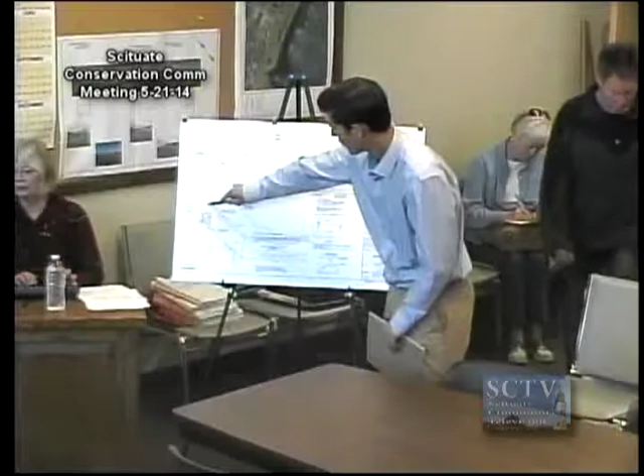For the record, my name is Jeff Bassett with Morse Engineering. This is an RDA for a septic repair at 111 Summer Street. This property is about an acre in size. We have the wetlands delineated by Brad Holmes, shown in blue here, with a 50-foot buffer in red and a 100-foot buffer in green. The property is developed with a bituminous concrete driveway, a single-family dwelling, and a barn. Currently the cesspool is in the backyard. It failed the Title V inspection, so we're looking to put in a new system. I believe the owners are looking to sell the property, so that's what triggered this process.

We did test pits back here and found good loamy sand down about 4 to 4.5 feet. The grade comes up right here, which is why we chose this area. The elevation is about 111 over the deck or patio in the back, and it drops off fairly quickly to 108. So we're able to extend that grade out a little bit and work in a leaching field where it won't look like a mound, since we found good material.

Due to the extent of the wetlands, there's a limited area. This area is also very low lying — it's pretty wet when you walk around there after a storm. The grade's a little higher out front, but after you put a 10-foot setback to the property line, and there's a large tree, a driveway, walkway, and retaining wall, there really isn't any room. So we feel this is the best location for the septic.

There are 2 test pits. It runs by gravity to a septic tank, and then a pump chamber will pump it up to the field. We do have an erosion control barrier at the limit of work.

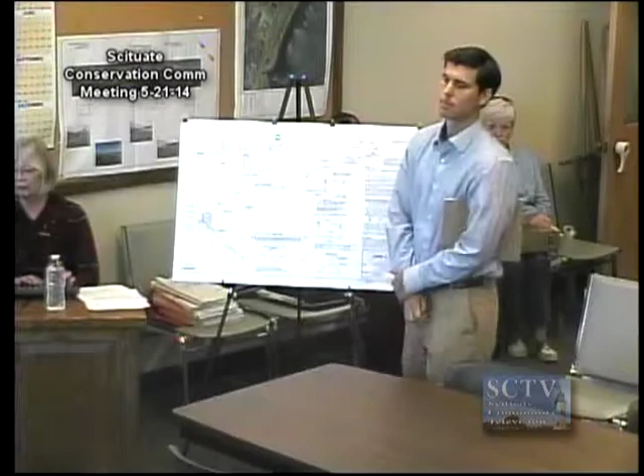So the tank you're putting in now, how far is that from the wetlands delineation? The tanks are 100 feet. The leaching field, the plastic chambers, about a foot deep, 2.5 feet wide by 5 feet long, are 81 feet from the wetland. And that's as far up as you can get it, really, with the soil testing and so on. And it's the same size tank you're replacing it with as the one you're removing?

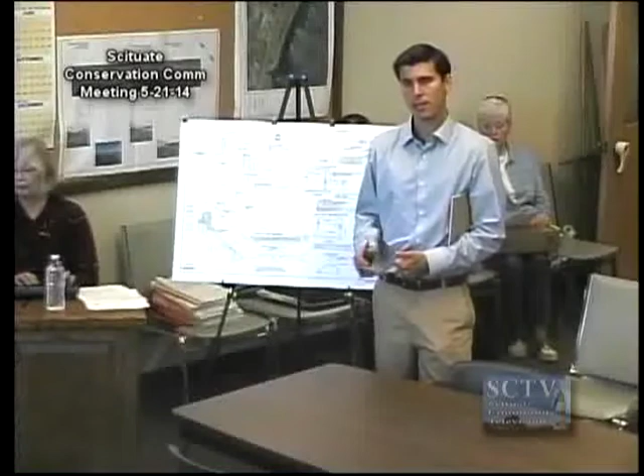No, the regulations were different when this was installed. It's basically just some type of cesspool on the ground. By today's Title V standards, you have to have a 1,500-gallon septic tank. And in this case, it has to be pumped in elevation to get adequate groundwater separation.

So we need a pump chamber as well, and then a leaching field. In the past, they would just do a pit that was deep, and that didn't protect the environment because the bottom of it went into the groundwater table, and you get bacteria breakdown as it infiltrates through the soil. So now what they do is a horizontally larger system, only about a foot deep, so it spreads the leaching out more, instead of just a small pit. We're replacing that with a larger system because that's the new standard.

The former owner of this house did a lot of site work and stuff himself, so there could be almost anything in the backyard. From years and years ago, not recently. You know, if you walk out there, there's stuff from years and years ago.

Penny, did you ask about some material that's sort of in the wetlands? Yeah, there was some clearing stuff in the buffer, and there's debris in the wetlands. There may even be concrete and brick stuff, but there's a lot of old Christmas trees and stuff like that that's dumped into the wetland and the buffer, so we could probably get some of that cleaned up as part of this project. I think that'd be a good idea.

We could condition it, even though it's an RDA. It might not be a bad idea to have some sort of markers too on this one, so that people know where the wetlands are. But, yeah, okay.

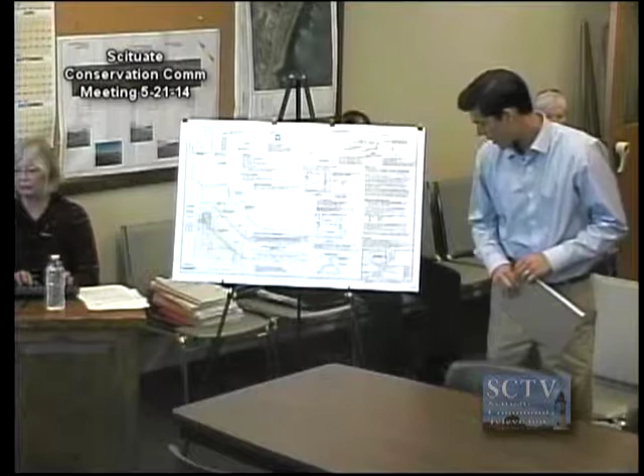4x4s with markers. Did this one go through DEP, Board of Health already? Yes, it has. We submitted it about a month ago. We got a couple comments, just adding a note, a couple notes which didn't change the design. We submitted that back on May 12th. I called a couple times, left a voicemail today just trying to verify if it had actually been signed off on. I believe it has, but I can't confirm that.

So pending the sign off, we could still find it a negative pending the finding, with a couple of conditions on there. Okay, anybody in the audience for this?

Okay, a motion? I make a motion for a negative 3. Great, second, with the aforementioned conditions. All in favor? Aye. Thank you, sir. All right, thank you.

Geary, 0 and 23 Parker Ave, amended stormwater.

I love this guy. Holy moly.

On May 21st, 2014, at 6:45 PM, Town Hall, the Scituate Conservation Commission will hold a wetlands hearing under the Town of Scituate Code of Bylaws to amend the orders of condition issued under DEP file number 68-2457, regarding the application of Michael Geary to replace a retaining wall with a stone wall, revise the stormwater system, regrade, and install plantings on property located at 0 and 23 Parker Ave, Scituate. Abutters and other interested parties are invited to attend.

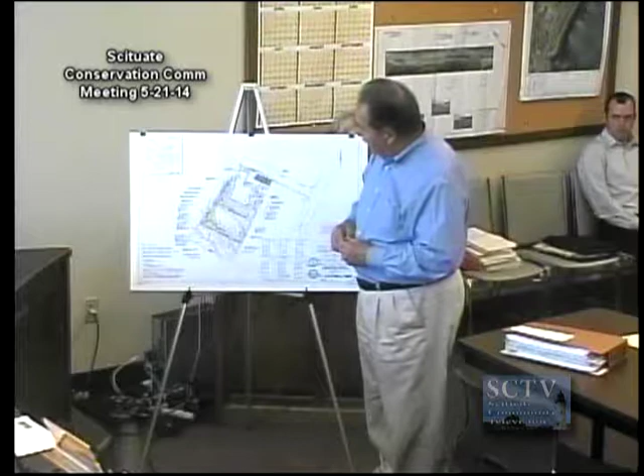What we are doing as far as stormwater is these yellow circles represent subsurface leaching pits. Outside the buffer zone, we'll take the runoff from this portion of the house and the driveway and recharge it back into these two pits. Down in the lower part, there are three additional pits that will pick up the water coming from this area toward the lower portion of the property.

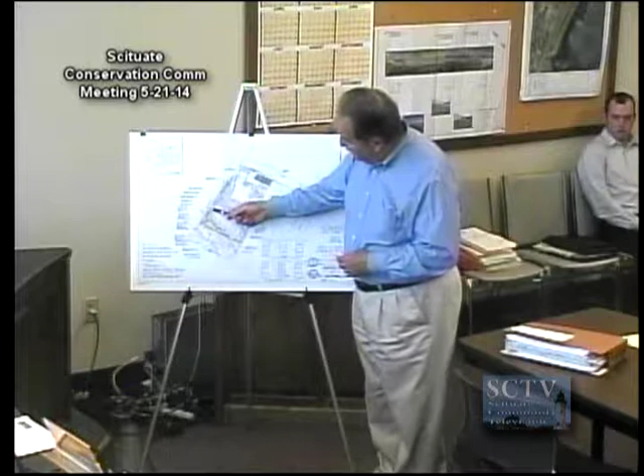This is the architect's plan as well. We've got a series of plantings along the perimeter of the area, as well as quite a bit of landscaping outside the buffer in this area here. So that's the extent of the changes.

What we've done is pull way back on the amount of fill we brought in on the site and the amount of wall, and we've done the stormwater calculations, which are being reviewed right now. So with that, I'll end my presentation and answer any questions you may have.

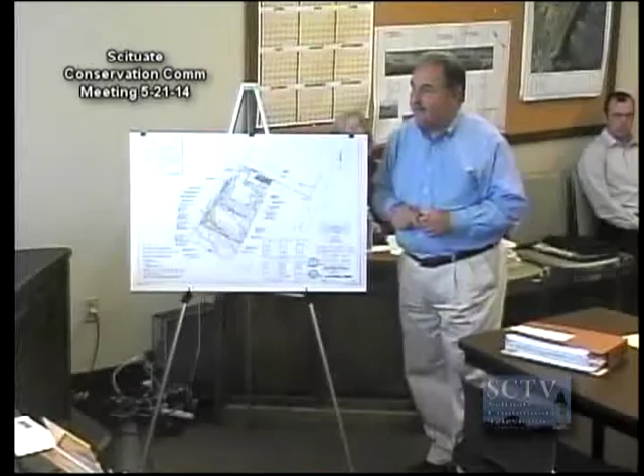Penny? I got this today, so I don't know if you already saw this on the additional comments, that we understand...

We review the project as it pertains to stormwater regulations in Scituate, and our initial review resulted in a number of relatively minor comments, some regarding the calculations, the nuts and bolts of the calculations. We had suggested test pits beneath some of the drainage structures, and there were some details on the plan we requested to be clarified so that it would be built correctly.

That resulted in a revised plan and submittal from Ross Engineering, which I subsequently reviewed. There was one outstanding comment, which is the comment you just read, Penny, regarding a detail. I submitted the letter to Pat yesterday because I wanted to get it to him as soon as possible. After the letter was submitted, Greg Tansey from Ross clarified that and showed me where that information was in the detail. So I followed up with a second letter to the commission, with no comment.

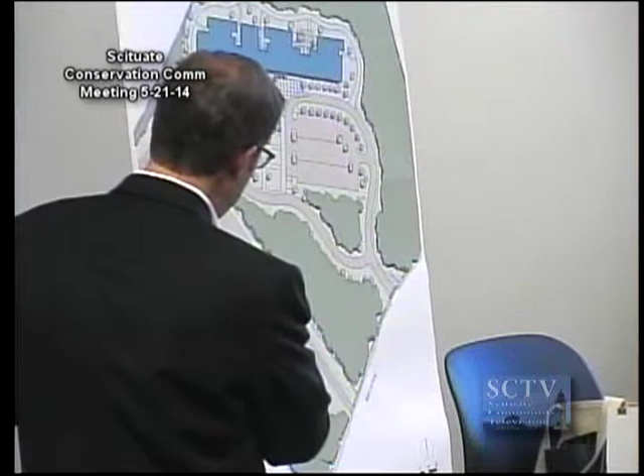The three sites are the existing Gates school site, the high school site, and the Ellis site. There's no wetlands at the Gates site. Okay, so at 3A and Mann Lot, the school controls about 22 acres of that property. For context, this is where public safety is currently being shown. The larger wetland, again both created by drainage, is in this corner here. We originally had the building pushed closer to the intersection, but we pulled it away to get out of that wetland buffer. The second wetland is here, which is much smaller, and certainly would be some jurisdictional concerns there. So those are the wetlands on this site, except for what we discovered that runs off the back of the school property down the far end of Mann Lot.

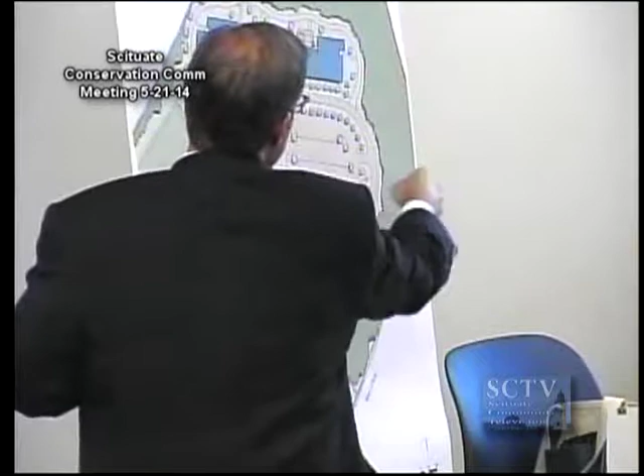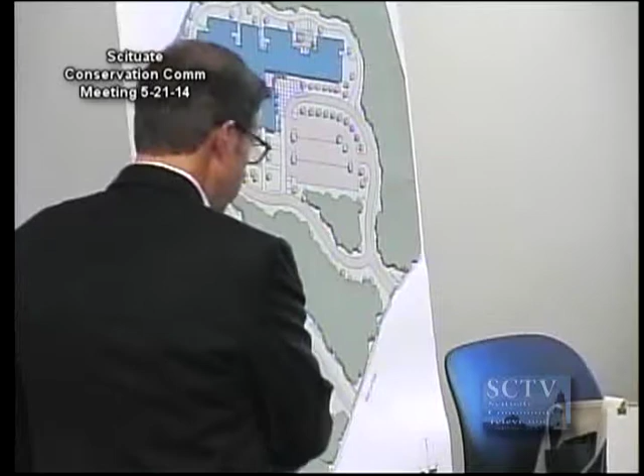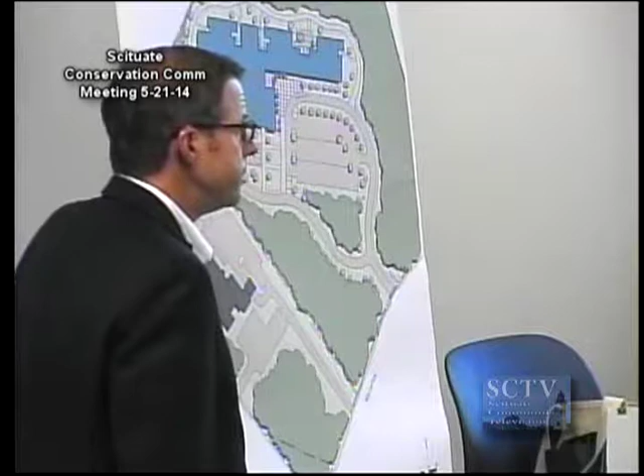So the school and all the development is, we suspect, outside even the buffer in that case. The two front ones are really small, isolated wetlands. They're pretty small, this one's very small. This one's a little bit bigger in the corner. But the back piece, Pat, is it BVW? I haven't been out there. Okay, so you can see it from Mann Lot Road.

So that's just a quick look at the Ellis site. At the high school site, what we're proposing is what's called a co-located middle high school, in that they'll be joined. Programs will still be separate, but it'll be a new middle school attached to the existing high school. Because there's some additional space in the high school, we'd actually utilize some of that high school space for the middle school, making the overall building more efficient in terms of its programmatic use. So just from a site planning perspective and where the building's going: Town Hall, Police, and Fire, 3A and First Parish Road.

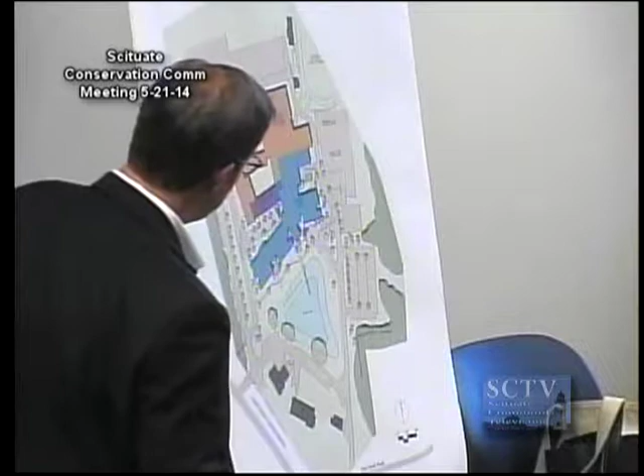Access into the high school is currently right here, with secondary access off of First Parish Road. All the buses run along down the right-hand side. So this blue would be the new 6th through 8th middle school. The thought is to bring the 6th grade up out of the elementary schools, include them in a middle school which is more traditional in nature, having the 3 grades. They're set up in teams or houses, so you have a 6th grade team, 7th grade team, 8th grade team, and this is all 2 stories.

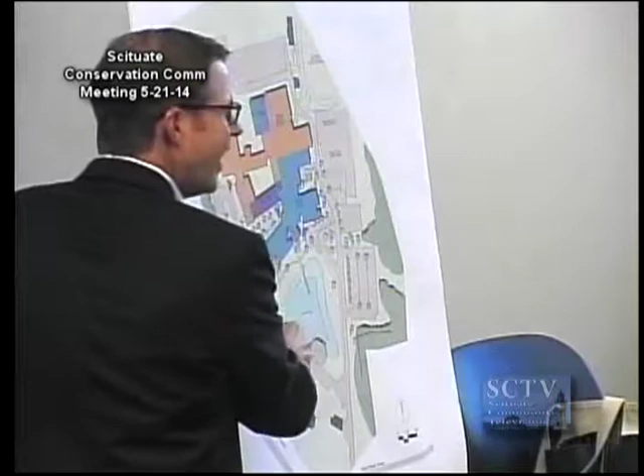You know what, we could probably just stick to how it pertains to the wetlands. Yeah, just giving you a sense of what's there. You'll have plenty of time to run this spiel, but I'm just trying to give you some context.

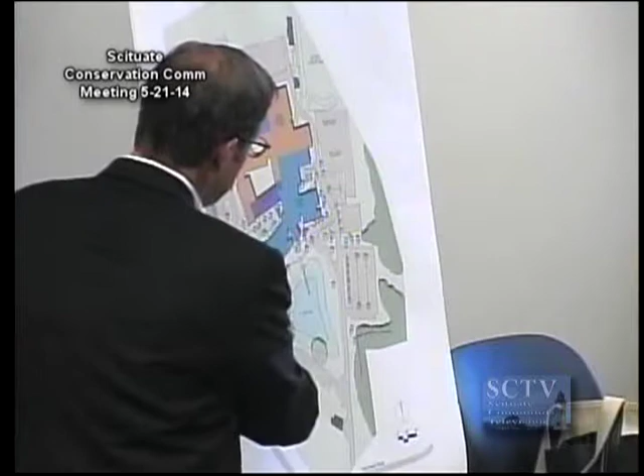So the vernal pool, this is the estimated edge of the vernal pool. We do have a survey that's done, and this is pretty darn close to that. As you know, as the vernal pool exists, it's developed right up to the edge of the water when the water's there. In fact, it's mowed into the vernal pool when it's dry. So what we're proposing to do is locate the building about 125 feet from the edge of the vernal pool.

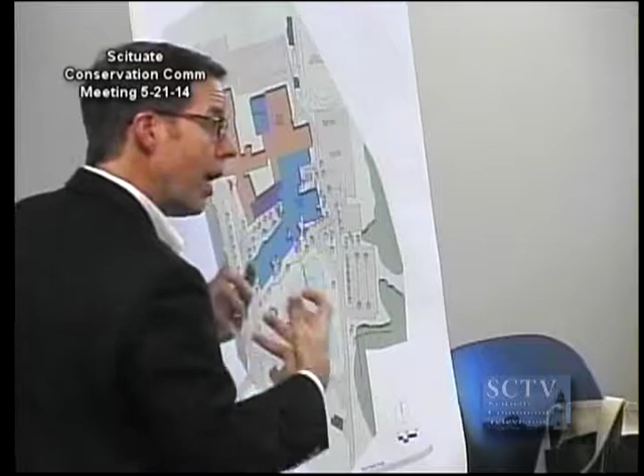We want to naturalize around the pool, and right now we're showing about a 50-foot buffer that would be completely naturalized. The thought is that the other grass around there would be secondary, perhaps mowed, perhaps not, but would not be developed, certainly would not be used for playfield as it's done now. One of the driving forces for the school from a programmatic perspective is to try to get more outdoor education, so we've created places to allow students to get outdoors, and we're hoping that we might be able to create some sort of a dock that would bring students down to the water's edge to observe, take water samples, things of that nature.

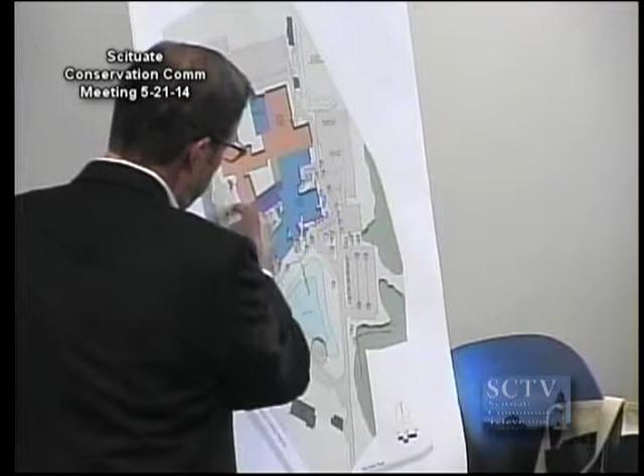That's what's being shown here as a possibility, and then perhaps a small walking path that connects the main entrance of the school back over to a sidewalk here, which leads to the high school. So that's the quick hit on what we're trying to do and how we're actually trying to enhance what's there now, as opposed to keeping its current situation and degrading it further. Really, kind of use it as a nature's classroom. It's a resource that currently right now is not used. It provides an opportunity for a sort of a nature's classroom, if we can find a way to enhance that as part of an educational program.

Pat, can I ask to be excused for a second?

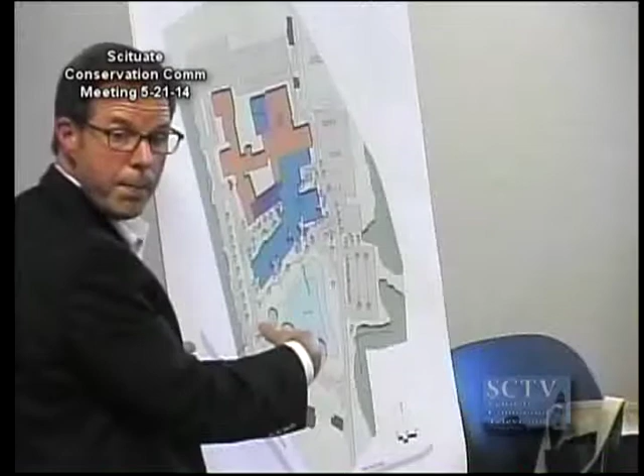Pat, can you see anything negative in this plan? I was just wondering if there's an area of trees in the back, are they to remain in this back corner, the wooded area by the playground, close to the edge of the pool there? Yes. On the other side, I don't think we've shown all the trees that are currently around the vernal pool, where that buffer, the light blue is. Yes, they'd still be there. So is the answer that you don't see any issue there?

I mean, I think there's probably going to be some questions because this has gone through the permitting process in the past, this area, so there'll be some old files that we will have to check.

As far as the outdoor classroom, it's done in other towns—boardwalks and things like that. You have to look at what's already disturbed around here; it's not pristine all around the area. There may be some flexibility, but it's going to involve other departments in addition to us. But I think we're at the point where we're interested in hearing about it.

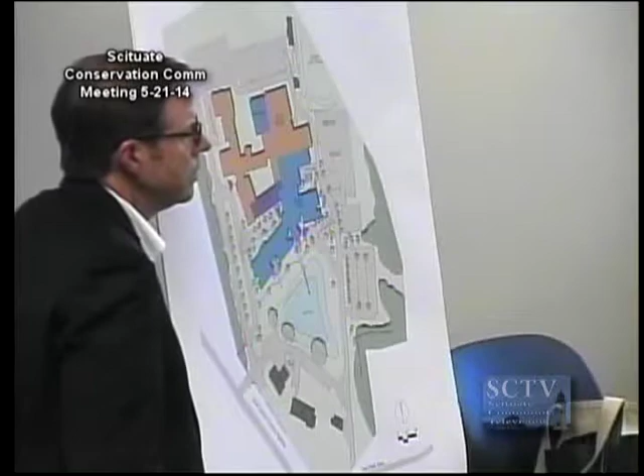Just a little bit of history. Obviously this was created for drainage for the high school, but Pat enlightened me that detention areas built long ago can become a vernal pool, wetland, whatever they evolve to. Today, if that were developed as a detention area, it wouldn't be—there'd be a stipulation that it would not become that, so it could be maintained. So it's kind of tricky in that we can't really maintain these things that were originally created as a drainage area. As was pointed out, right now the DPW has been mowing to its edge. Until a few years ago, it really wasn't recognized as a vernal pool.

A question came up when we were trying to look at doing the ball fields as to whether it was, and John Richardson, who's passed away, was an environmental consultant who came out and did a report for the commission and recognized it. Subsequently Pat's looked at it, and there's not much question that it's a vernal pool. But as you can see, it really hasn't been treated or protected very much.

So the consideration would be, when we discussed out there at the site, if a nice buffer could be constructed around it and protected, and then a grass area around that—it's by far better than how it's being dealt with now. So we're not endorsing the whole project one way or the other.

My kids are all long gone from this, but just in terms of protecting this as a resource, that seems like a reasonable approach. I did ask the question, though, and I don't think anybody really knows whether this is fed by any under drains, whether there's anything coming off the roof. Do we know whether this gets fed from, like, parking drainage?

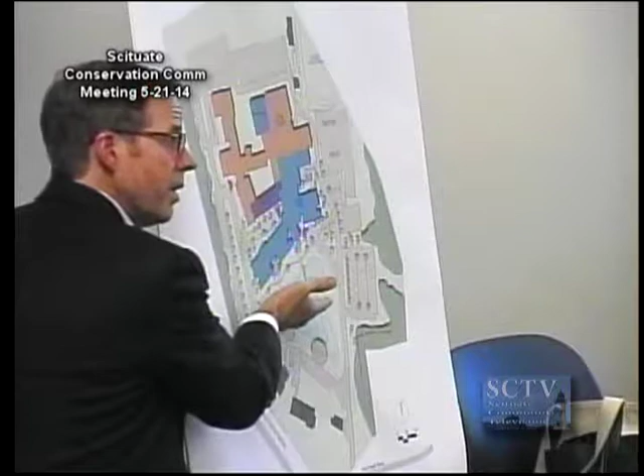Right, and that's what we're trying to maintain, because we understand there's a precedent the board has set previously. It's important to note that right now it's just about the edge of building that's 125, so there would be some disturbance during construction. And I believe you have jurisdiction within 250 feet of the vernal pool, so we'll be very careful with the protection of the pool during construction, pre-construction, post-construction, and so forth.

I think I can speak for this commission—I think we're a fairly realistic board, and when you have a piece that already has much more disturbance around it, and you're looking to make it better in the process. Yeah, I agree, totally. If that helps.

Before, when they tried to use it as ball fields, there was only going to be like a 40-foot buffer, and they wanted to fill—that's where the problem came in with them. So we really have to try and keep the 125 as close as possible, which is not just us, it's the state.

And the only other thing I do just want to point out is that the walkway, I think, is a great idea, but it could not be a paved walkway. Right, it would have to be more like a boardwalk. Yeah, something like that—that's the only thing I want you to make sure you're aware of from the get-go, that we're not going to let you put...

Couldn't Natural Heritage recommend some materials? Ms. Divas just got a whole bunch of recommendations on walkway guidelines, for your information. Yeah, for this trail. We want the walkway to be accessible, but also needs to be handicap accessible.

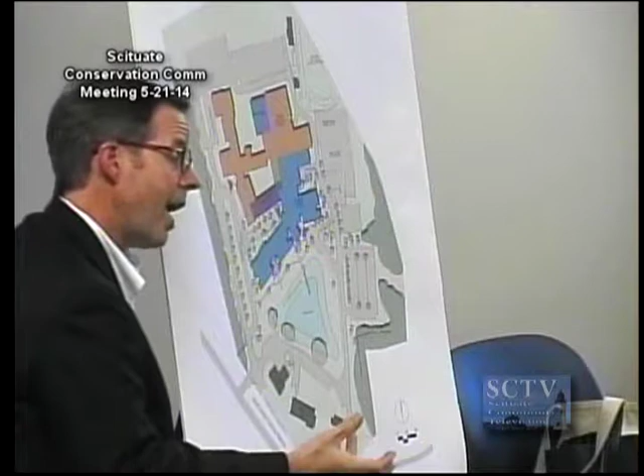As with access to the water's edge, they could suggest some material. But I think your key here is to try to keep that 125 foot buffer, because we were very strict on that when the rec department wanted to put a field in. It wasn't going to work because there was no way they would stay out of our buffer.

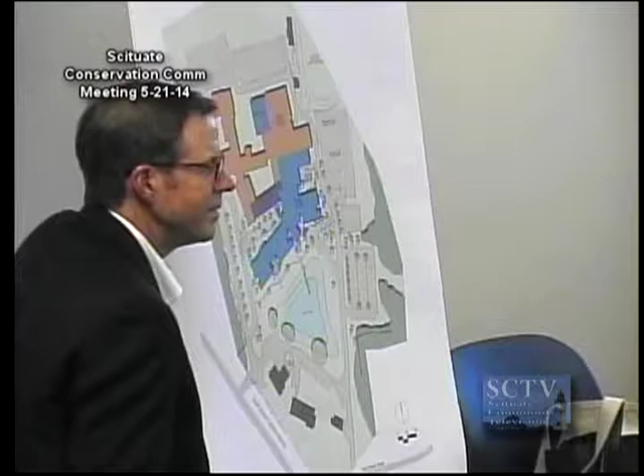Okay, excellent feedback. I'd love to see it used as an outdoor classroom. That's always been one idea. Well, regardless of what project or concept you ultimately settle on, this commission would really appreciate the opportunity to work with the schools through some sort of environmental studies program, and encourage you to incorporate even a small piece of that into your curriculum.

We're looking to do it. We're using a project-based learning approach, so we are going to be looking for a lot of projects for our students in the community, and certainly land and sea are really two areas that we're focusing on in our curriculum. And I think it's terrific, because I just came back from a vernal pool seminar in Belmont

that was put on by the Audubon, and it was fabulous. Yeah, it's a great learning opportunity. It's right here, right in our backyard, and nobody's using it.

Well, hopefully it'll enlighten folks so that down the road they'll appreciate why these are so important. Great, Steve? Yeah, I'd just caution you, before you go through a huge design on this, to make sure that there is an outlet to that vernal pool that goes through the parking lot and leads over to well 19.

Make sure that it's not considered a tributary to the reservoir, because if it is, we have a 150-foot non-disturbance zone. The ball field might be different because it's not a building, but if the school's only 125 feet away and that comes into play, you may need to push another 25 feet back. So I'd verify that before you do a big design on it.

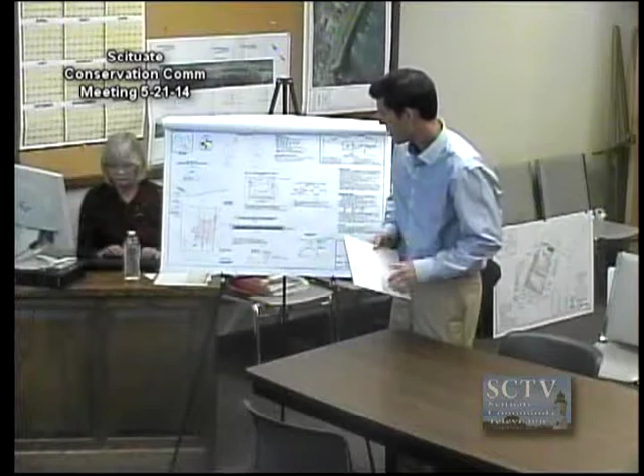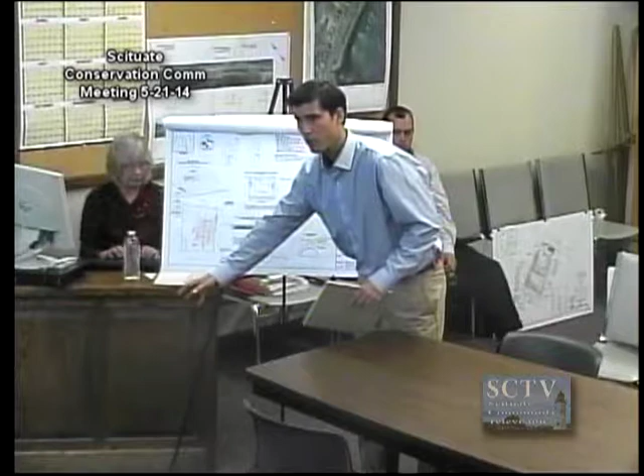For the record again, Jeff Bassett. This is another septic repair, Glades Road at number 117. It's a small property, less than 4,000 square feet in size. It also has a 10-foot wide easement on the southerly side of the property. So Glades Road is here, and then there's that concrete retaining wall, the boulder retaining wall, and then the ocean.

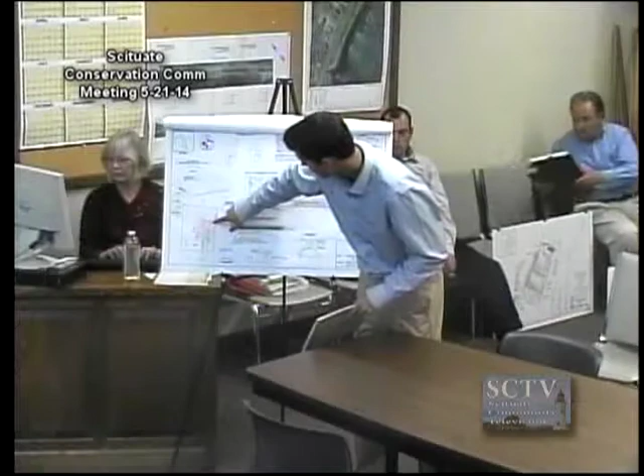We filed an NOI for this one. We're outside of the 100-foot buffer to the salt marsh, but it is entirely within a barrier beach as well as FEMA Zone AO. So in this case, they have a cesspool, which is believed to be under this concrete pad here, and it will fail a Title V inspection because it will intercept the groundwater table. So we dug a test pit next to the house, and we decided to put a new tank behind the house, and then we'll put 2 trenches to make up the leaching field under the house.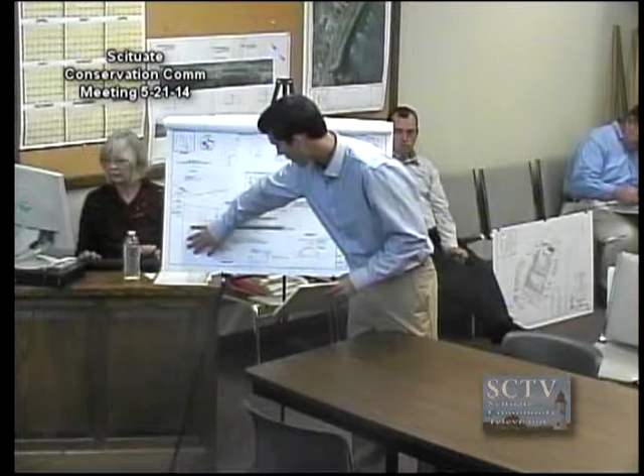There's about 6 feet of headroom under there, so it can be done. There'll be a little bit of hand digging, a little bit difficult to install, but it can be done. We chose to put these under the house because it'll be a little bit protected, and there's traffic and parking throughout this entire property, so I think that's the most ideal location.

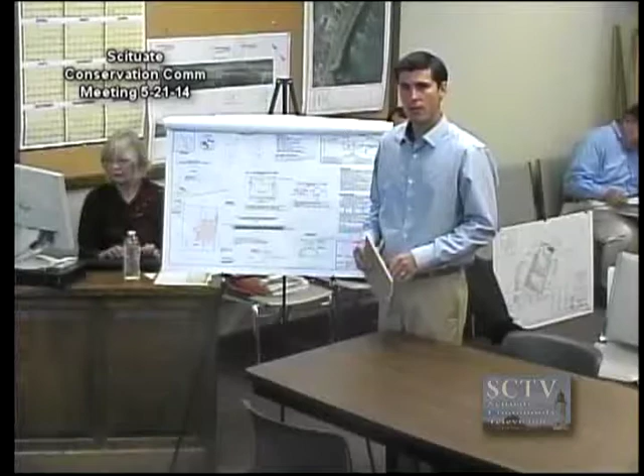The property currently has really no vegetation on it. It's all sand and cobblestones. And I think that's it. Any questions?

It's an improvement from what's there. Put a septic system in some of these places. You have to, it's unbelievable. No, of course, but it's amazing.

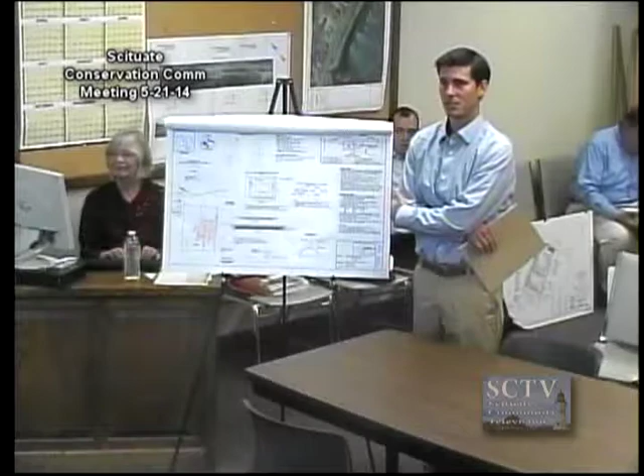Has the Board of Health approved this yet? This is another one we filed with them a month ago, and we left a voicemail on that. I gotta believe it is, but I can't say for sure. Yeah, unfortunately they're with a part-time agent now, so. Oh, that's right, yeah, I forgot.

Richard? Other than that needs to be accomplished, no questions. Good, just waiting for the approval. Where did Pat go? Said he was outside, I'll let them know. Anybody in the audience?

Well Frank, does he have questions? No, I don't think, other than the poor guy that's got to install it. Oh jeez, can you imagine? Okay, they're gonna use a little mini excavator that doesn't have a cab on top, so it only sits about this high. Right, right, talked to a couple guys about it. I'm excited what they can do. Oh, they'll get it. Okay.

Okay, I guess, motion to close? Second. All in favor? Aye. And it's subject to the Board of Health approval, right. Right. Okay, thank you.

Burke, 50 Surfside wetland delineation. This we need that for, right?

Yeah, on May 21st, 2014, the Town Hall Scituate Conservation Commission will hold a wetlands hearing under Chapter 131, Section 40, Massachusetts General Laws, and Section 30700, Town of Scituate Code of Bylaws, regarding the application of Brian Burke to delineate a wetland on property located at 50 Surfside Road, Scituate. Abutters and other interested parties are invited to attend.

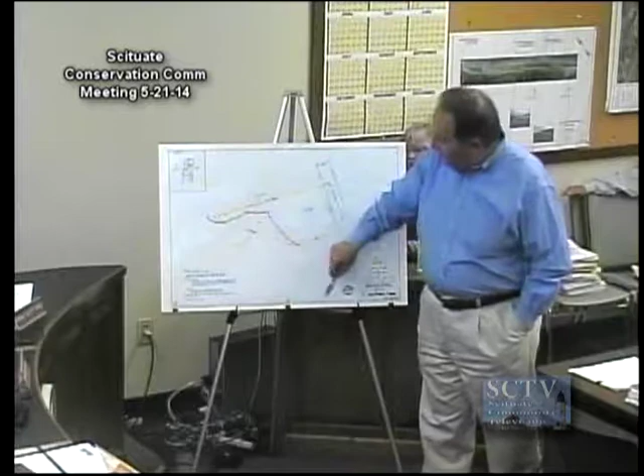Brad Holmes flagged the wetland line, which is an existing lawn area. This is a relatively old site in the sense that it really predates the Wetlands Protection Act. When we flagged the wetlands, this is all lawn, and Brad couldn't be here tonight because he had to be in another town, but when he did flag it, he noted that there's no wetland vegetation in the lawn area. Because it does predate the Wetlands Protection Act, which was established in 1968, this is not considered altered land. Having said that, he did not look at soils, and he did not look at hydrology, because you don't have to do that.

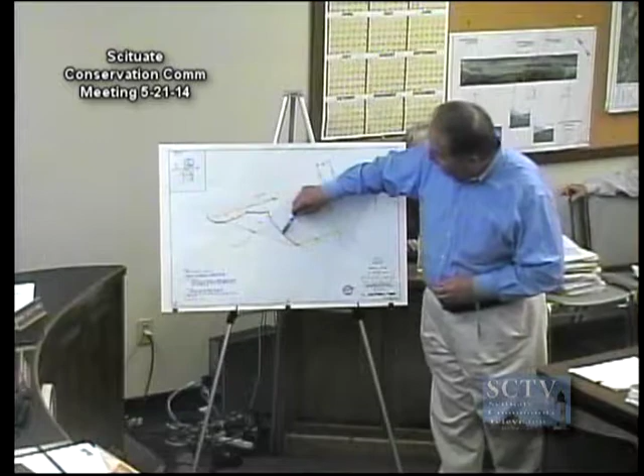It's not altered land. Did he look at soils? He did not. So how do you determine a line that's all vegetation? There's phragmites in this area here, so it's essentially the edge of the lawn for the most part.

The purpose of this application is simply to establish the edge of the resource area being the bordering vegetated wetland. The land is in land subject to coastal storm flowage because of the elevation. It's also on a mapped barrier beach, but those aren't resource areas that we're asking to have reviewed by the commission.

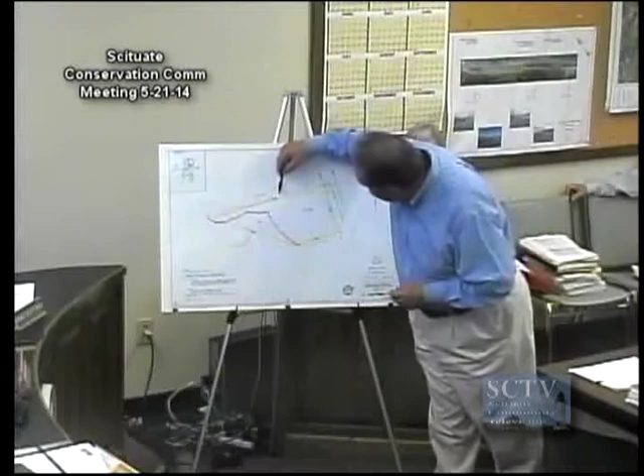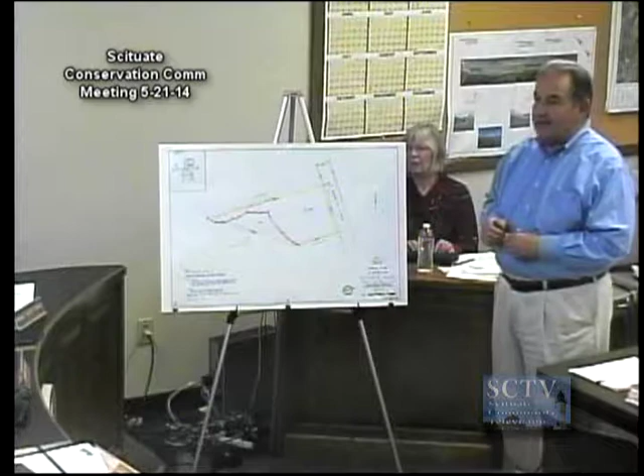This area over here is the edge of the driveway. There's vacant land in this area here. So with that, I'll end my presentation and answer any questions you may have. Penny? I'm pretty familiar with this piece of property. It's all, and it has been lawn area since back in the 50s.

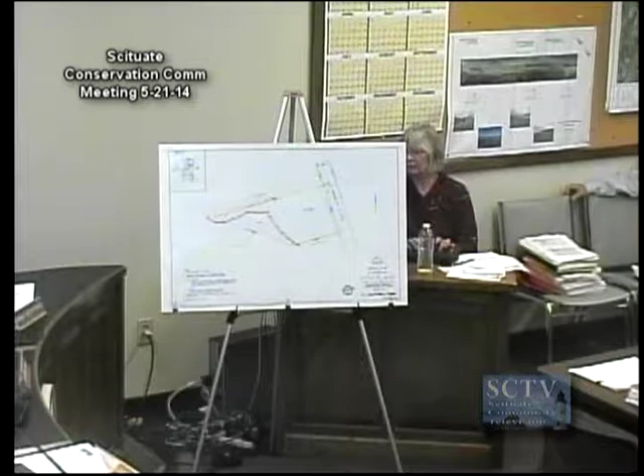I am concerned, I think there's been fill going on. Not real recent, but I do think fill's in there, and I kind of would like to see some soil samples done before I take this as the wetlands line. That's just my feeling. Richard? Exactly the same.

I'd like to clarify this for my own knowledge. So the point here is that because this piece of property predates the wetlands regulations, it's not subject to the same wetland regulations that we're enforcing now. So therefore, it allows you to declare that it's altered land because you don't have to

go within the guidelines of the Wetlands Protection Act. Well, okay, in a case like this, and I spoke to Brad about it, he said if there was wetland vegetation inside the lawn area, he could look at it because there was a predominance of wetland vegetation. He said that's not the case. And section 10.55 is very clear about land that has been disturbed by cutting, filling, or cultivation.

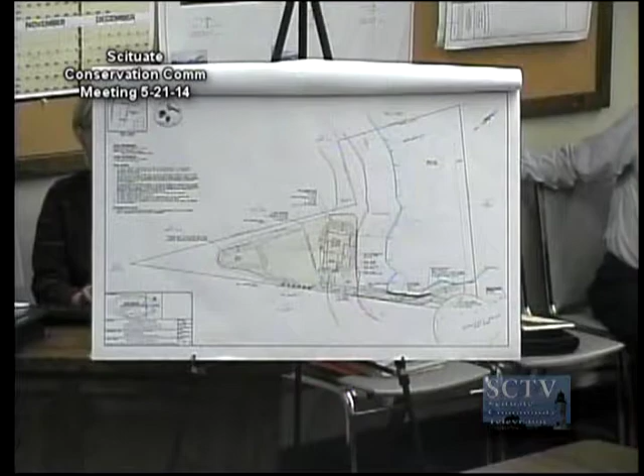At the last meeting, we talked about having a peer review the stormwater portion of this project. It went out to Josh Bose with Merrill Associates, who is here. Based on that review, I concluded that this project's stormwater calculations and a report were previously submitted under the notice of intent filing for the original order of conditions, and therefore it meets the intent of section 4.B.1, which makes it exempt from having to prepare a new full stormwater calculation. That's because the stormwater report was already done, and the new plan conforms with the grading, improving the grading. The building envelope is a smaller building that better complies with the setbacks.

The impervious area, which we're reducing, and the drainage patterns, which we're maintaining. So also, through the comments from Josh, as well as yourselves and Pat, we filed the revised plans with a few improvements. We added flow arrows to the driveway to make it more clear to the contractor that the entire driveway should grade to the trench. We're also providing plantings within the depression in the back for stormwater. We're specifying that a test pit must be performed by a soil evaluator in the area of the drainage to verify that it is above the groundwater table.

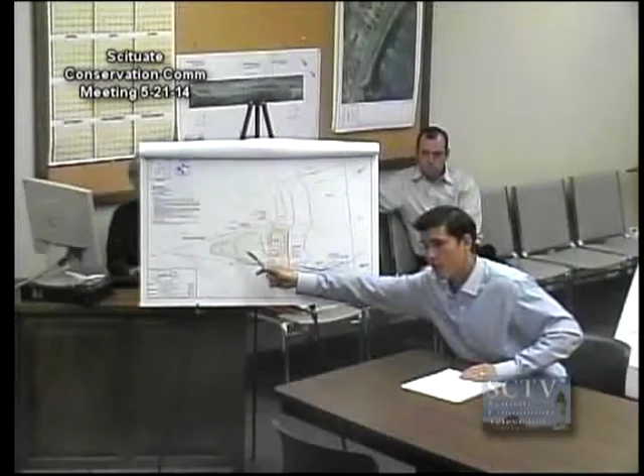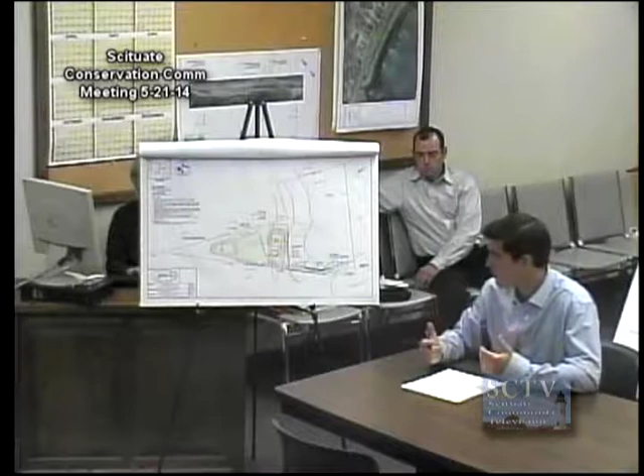I'm proposing that for this rear portion, but through additional conversations with the reviewer, I think it'd be a good idea to do another one at the low point of the driveway during construction. We're also reducing the limit of work and the tree clearing by moving this basin closer to the house by about 12, 15 feet, just to bring the tree line forward. There's really no reason to clear all the way into that triangular portion in the back. We're providing arborvitaes along the property line here, and specifying an E-One sewer pump, which will be necessary.

So I'd be glad to open it up to any questions. Penny? I'm okay right now. Richard? No, I like it a lot better and appreciate all the adjustments. We might have an abutter here, because we had one the last time. Bill? Yeah, I remember asking for these, and I remember some concerns about abutters, so I think this is addressing those issues. As far as I can see, I'd like to hear from the consultant. Lisa?

Pat, do you want to add anything to it? I was just going to say, the latest, there were some comments from Josh, and then Jeff was addressing them. If Josh is in the room and wants to... you didn't see it, go ahead.

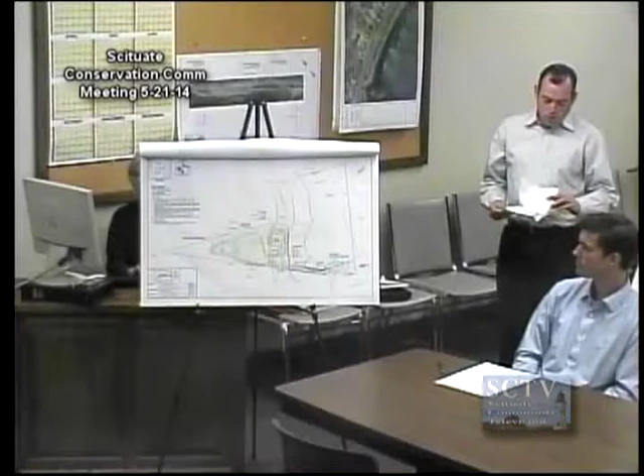For the record, my name is Joshua Bose from Merrill Associates. We reviewed the project plan prior to this plan, provided some comments to the record engineer, then reviewed this current plan and issued our latest revision, our latest review letter today.

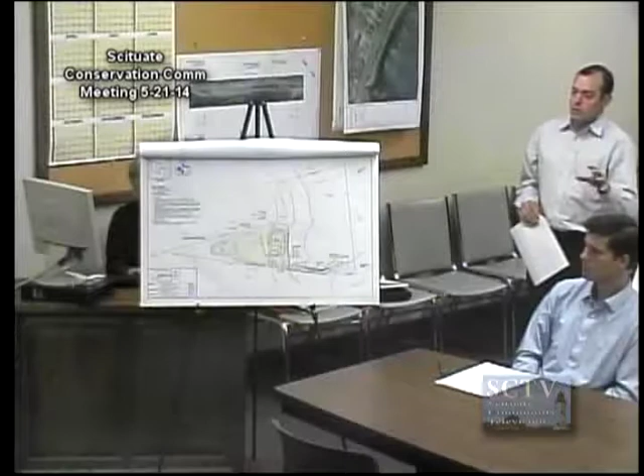I think one comment is probably housekeeping, but important for this project. It's a unique situation where there was a previous order of conditions permit by another engineer, with a stormwater calculation booklet associated with that previous development. I think it's important not to associate that with this particular design. This design is similar, same approach, a lot of similarities, but there are differences. So for the record, I think it's important that the commission not use that booklet or those calculations as documentation for this design.

Because if there are issues with the calculations, there's a separate engineer. He's not going to be liable for a new development, and he's not going to agree that this new design is applicable to his calculation. So I think it's just a...

This was the old Kimberly design? Yes. Okay, 10, I think it was 10 or 12 years ago. Right, exactly.

Again, I think an amended order of conditions is certainly something the commission could consider for this, but I just don't want the record to reflect that those calculations apply to this design, because that would not be correct. To the stormwater engineer: does this meet our current stormwater bylaw? That wasn't reviewed, we don't have an application or any review of that. It's the applicant's position that this is exempt from the stormwater bylaw because of the original order of conditions for this project.

So I'm a little bit puzzled, now that I remember. If we're not going to go by our current stormwater bylaw, but we're also not going to go with the stormwater calculations that were put together for Kimberly, give me the logic.

Under section 4.B.1, which I briefly described, it's an exemption where, say you're doing a definitive subdivision and you've done all the stormwater calculations for the development, then you don't have to come back and do an individual stormwater report for each lot. It's my understanding that this project meets the intent of that, because a full stormwater calculation and all the reports was already done for this project. It would just be like a subdivision lot where you show a typical house and a typical driveway, and as long as the new owner doesn't come in and build a much bigger house or a much larger driveway, they fall under that previous permit.

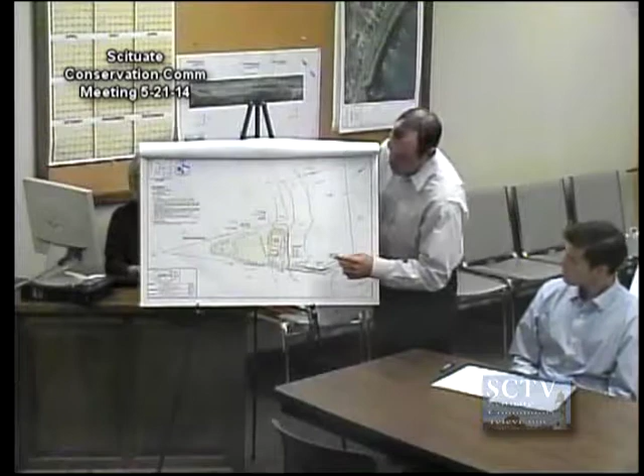And then the swale in the back of the property, I think more information is warranted on the operation of the swale. It's certainly at or near the bottom, at or near groundwater. And it's important for the commission to understand if it's going to hold water, if it's going to drain, if it would hold standing water, and how long it would hold standing water for. And that was my final comment.

Yeah, so the swale is above the groundwater table. It's not really designed to infiltrate. It doesn't have the full 2 feet most likely, but we will do a test pit during construction just to verify that. It's very shallow. It has a large surface area, so we calculate the time to infiltrate into the soil based on the volume and the surface area. So I don't doubt that it will drain within the standard 72 hours.

I have here a dewatering detail which I'll submit, and I also have provided a long-term operation and maintenance plan for the whole stormwater system. It details how to maintain the roof dry wells, the gutter and downspout system, the stone trenches, and the swales and that depression, meaning mowing it, trimming the plantings, removing any debris, sediment, or any erosion. So I'll submit that. And then lastly is where to discharge the sump pump or the foundation drain.

I would propose that the sump pump must be outside of the 50-foot buffer. And for the foundation drain, we have raised the elevation of the foundation here, so we will keep that as far away from the wetland as possible. It will be an improvement from what was previously designed.

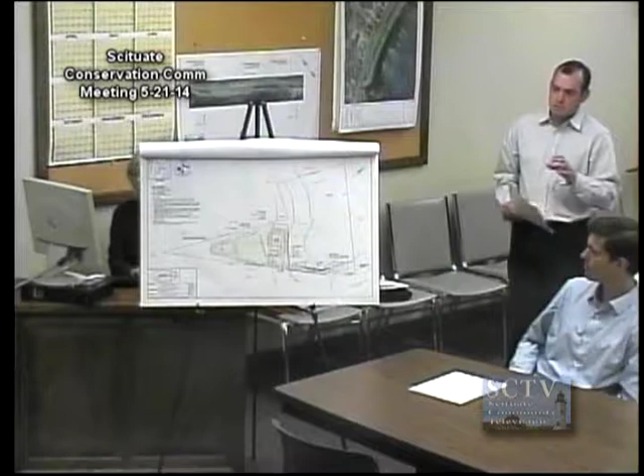How's that sound to you, Josh? Yeah, I haven't seen the dewatering plan yet, of course, but I think both of those, the provision to keep the sump pump out of the 50-foot buffer, is more than acceptable. And the foundation drain, it depends on how it's built and what elevation it's put at, but if it's going to be kept out of the wetlands, the foundation drain is going to need to be kept higher than your standard foundation drain that sits at the footing.

That it's not as much protection as you'd like to see, but it's really out of my jurisdiction. I'm just concerned with the impact of the work that would be necessary in the buffer or in the wetland.

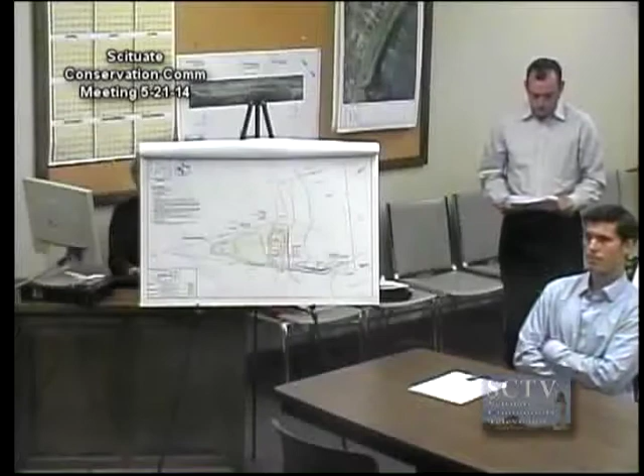We just went through a torturous project off of Tilden Road for all these reasons, that discharge, dewatering, none of these things are met. So if it seems like we're being a little bit sticklers on some of this, it's because we're dealing with an awful mess right now. And this is a wet site, there's no getting around it. So anything that we can do to minimize those problems.

Yeah, so on the plan that was approved, they have the basement at elevation 58, which I personally wasn't really comfortable with. I raised it by 2 feet, so we're 2 feet higher with the basement now. So what's the elevation of the wetlands, roughly? About 59. 59 hits here, and then again here, about 59 and a half here.

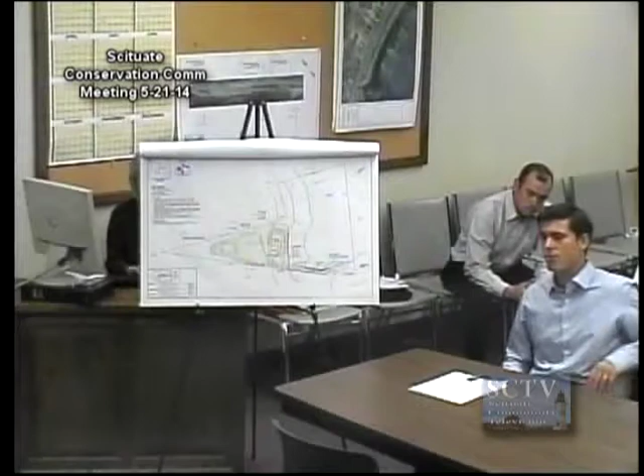So you're still... so you probably don't need a foundation drain. If it's possible to put one in, it'd be nice, but I would think a sump pump would be adequate. But yeah, I would definitely want to put a foundation drain if there's a way to do it. Yeah, I don't see how you, I mean, you're already lower than that wetland, so, right?

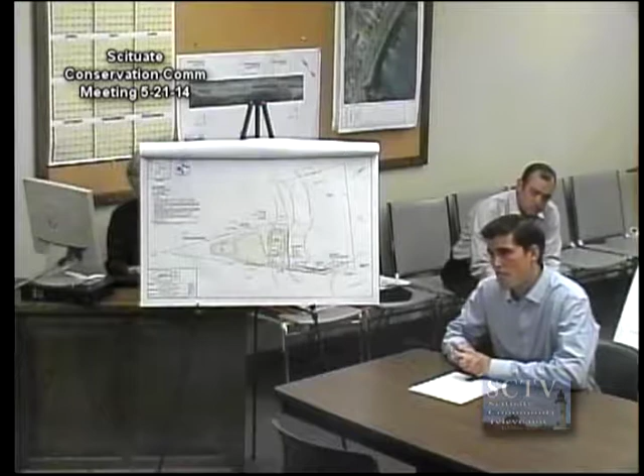Yeah, so even if it was laid level, perfectly flat, put right below the slab, it would help a little bit. But I think we're relying on the sump pump primarily, and the fact that I've raised it by 2 feet. Right, I mean, we're not here to keep water out of people's basements, but I'd say you're pretty close. That's why I brought it up.

Well, we're at 58, and I'm at 60 here. I am 2 feet above. I usually try to stay at least a foot, so I'm a little more than usual.

Anything else? I think they've answered that the test pit at the swale is gonna get done, and the test pit at the driveway is gonna get done. Sump pump discharge we talked about, so the other thing we'll need is the dewatering plan when that becomes necessary. There's no O&M plan.

Okay, so do we close this? I would think that some of the things we talked about could be conditions. Yep, that's what I was thinking. Those things I just mentioned, as conditions. So we could close this hearing and do a set of conditions. Okay, make a motion to close. Second? All in favor? Aye. Great, and we'll stick this with that.